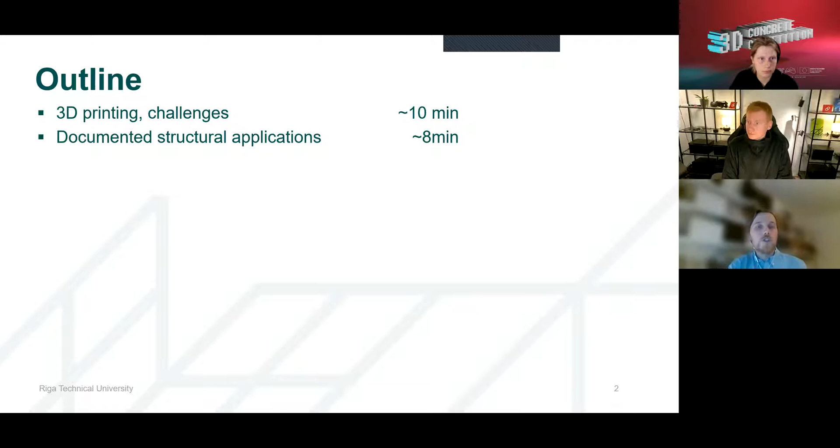Then I will show some documented structural applications of 3D printing, with emphasis on structural, show some topicality in the industry right now, show what we are doing at the laboratory in Riga, and what the 3D concrete printing industry is doing in Latvia in general, and show some examples that may help you in the process for the 3D printing contest. So the first part will be more general about 3D concrete printing, and the second part will be more specific, probably for this event.

For the first half of my presentation, I have taken the information from the largest scientific conference on 3D printing.

This was last year's conference, Digital Concrete 2020. For some of the slides, there are no references to the original authors. So if you have any real interest in those slides and pictures, you can definitely email me, and I can give the information about the original authors.

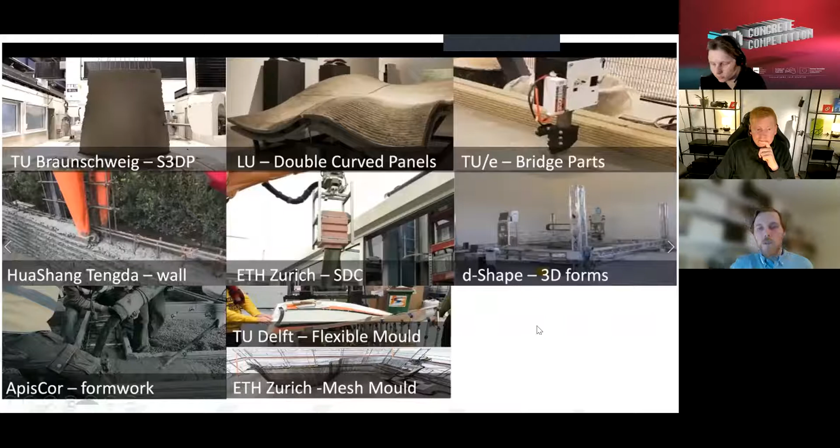If we start with 3D printing, here are actually 9 different pictures with companies and universities that are doing some kind of 3D printing, so we should understand which kind of 3D printing we are talking about today. For example, D-Shape here is producing these structures using powder bed technology. In a powder bed, with the layers you jet in a binder, and then you have this really free form structure. They were one of the first ones to do 3D printing, but this is not the industry standard right now.

You have some more traditional ways, Apis Cor and other companies, using 3D printing as a formwork, or you can call this contour crafting. So you print the outer structure of your wall, for example, and then fill it with traditional concrete. This is also 3D printing. Some more unconventional ways from TU Braunschweig: this is 3D printed with shotcrete. There are 2 robotic arms applying shotcrete to this steel mesh construction. So this is also 3D printing, but with some limitations and specialized.

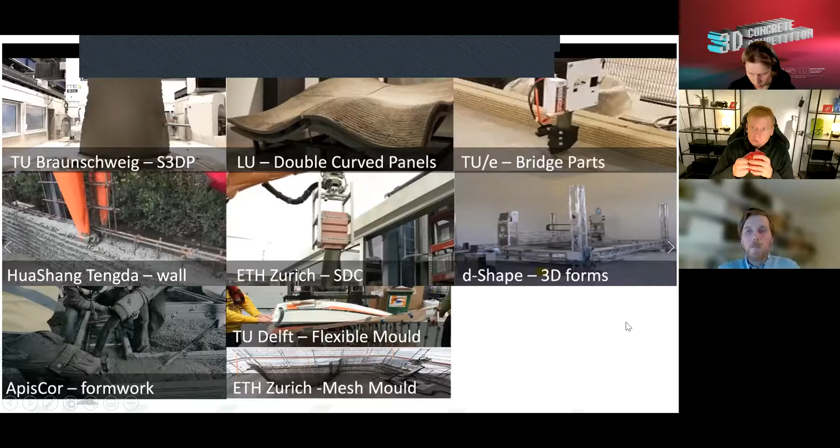For example, ETH Zurich with their smart dynamic casting, slip molds, or mesh mold, where a mesh was produced by robotic arms, and then human labor was just applying mortar to it. So there are different ways that 3D printing is done, but today we will be talking more about extrusion-based 3D printing. This is a process in which a real free-form object is created from a digital file using a specially designed concrete composition and a concrete printer with an extrusion-based print head. So we extrude the material layer by layer.

As you know, there are several advantages to this fabrication method. One is definitely freedom of form, so we can produce free form structures without the need of molds. There is the advantage of automation of the construction industry and optimization of structures, as you will see in later slides, how you can optimize your construction if you apply material only where you need it. And also probable CO2 reduction in the future. That's why there's a question mark, because CO2 reduction, cost reduction, labor force reduction are all probable future advantages. Right now, all of these structures require a lot of cement to be printed, so CO2 reduction is quite debatable.

Material waste reduction: if we were doing only 3D printing all the time and were very good at it, then there would be reduction from molds and material leftovers. But at this point, I would say material reduction is still debatable. So there are significant advantages, but you have to be careful, as this is a new emerging industry. There are a lot of claims in mainstream media about wonders this technology can do.

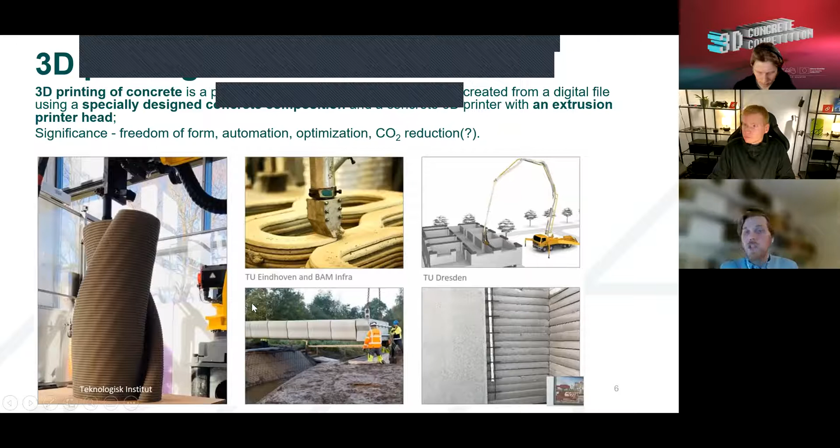They are printing with these fast setting binders, where you can print really freeform structures. Or, for example, TU Eindhoven, who is printing and applying steel reinforcement at the same time, and creating, for example, bridges that you will see also in later slides.

Or, for example, TU Dresden, who is envisioning that 3D printing could be used to print more regular structures using traditional methods, just with the print head at the very end of this building process. I will show right now a few different extrusion modes that are possible.

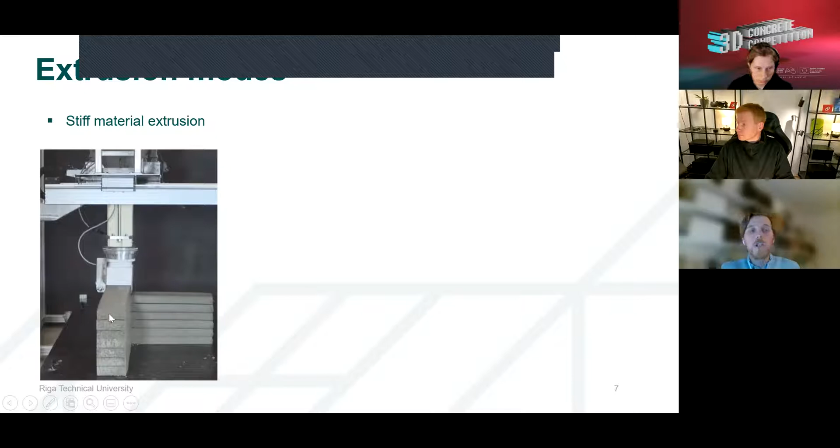So we can work with stiff material extrusion, but this has some limitations. The buildability with this material is really great. You can build high, but there could be problems with the layering, and problems with the pumping of this material and extrusion. There is a possibility to work with extremely flowable material, but then you have to have a fast setting material that is setting as you print it.

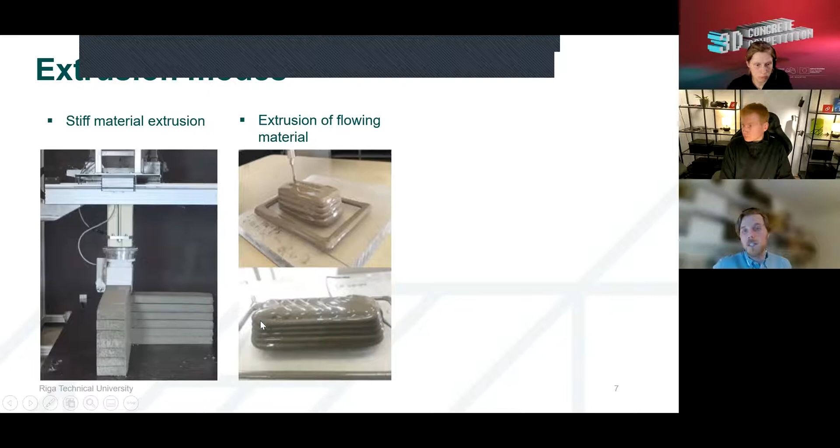And most commonly, and what we are using today, is what you can call oriented pressing. So you press the material upon the previous layer to get a more flat form for stability, and also so that the layers stick very well between themselves.

Here, I think there are. I will see if the video will work very well.

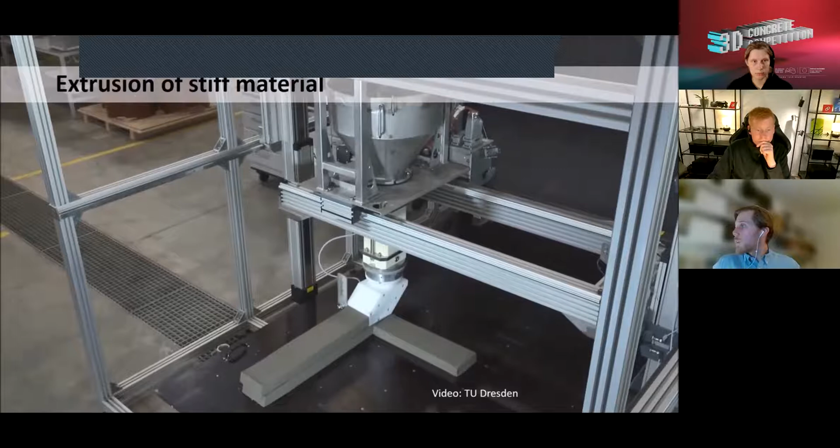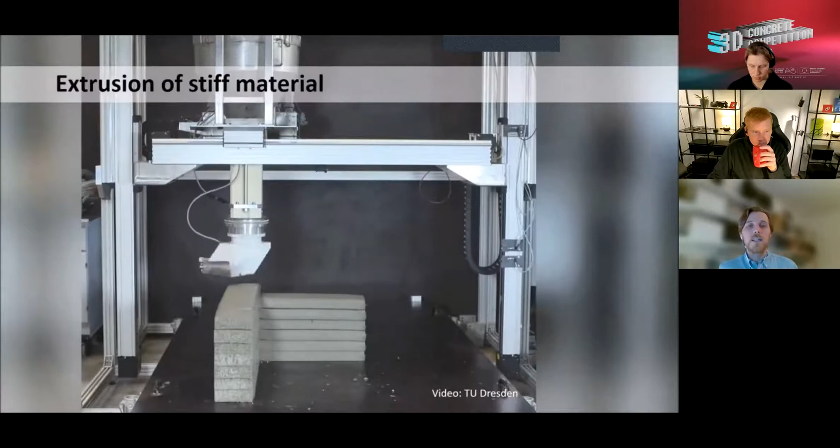I think it's okay. Yeah, so you can see from TU Dresden this extrusion with the stiff material. It looks really nice, but this is definitely not something that is being done in industry today. Or you can work with a very flowable material. This is done by several companies that have these fast setting binders. But usually it is something in the middle, with the material that is used for this oriented pressing.

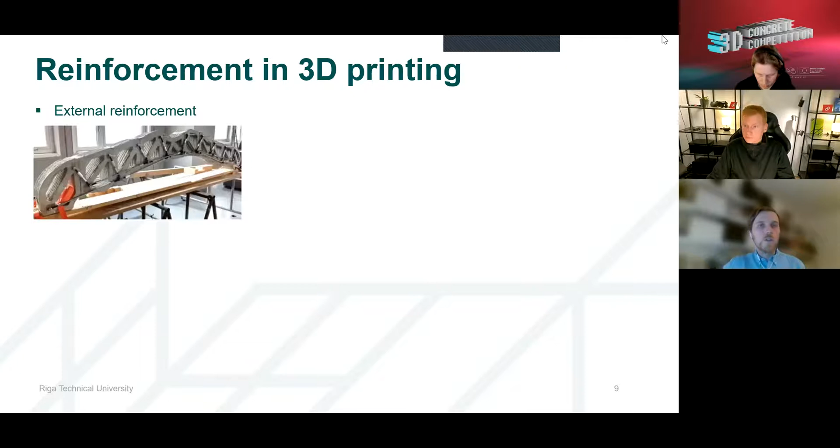I will cover a little bit also about reinforcement in 3D printing, because reinforcement and 3D printing are not very compatible. As you understand, in traditional concrete you first apply reinforcement, then you cover it with concrete. Here, it's not that easy to do that. So there are several methods. First of all, you could do external reinforcement, but this is definitely not done regularly, because the reinforcement is subjected to corrosion, and this is an expensive and really unconventional way to apply reinforcement.

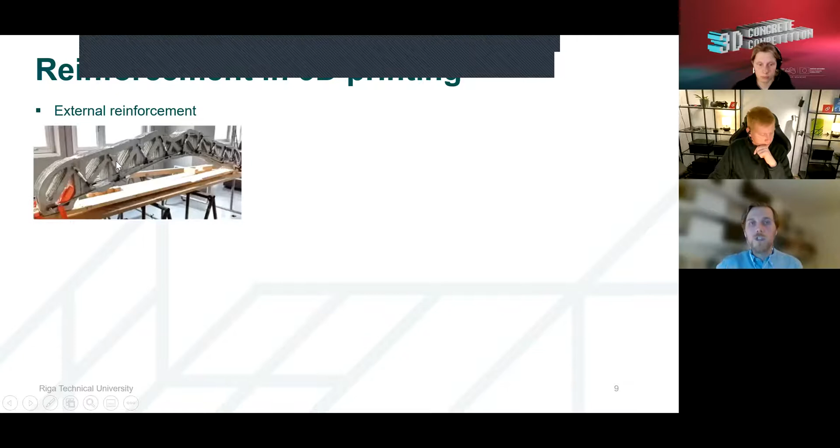One of the ways that is being used in 3D printing is post-tensioning. So you print these different blocks. Actually, they are printed sideways, and then flipped around, and afterwards, like you can see here, there is traditionally cast concrete. There is a steel wire that's run through all of this structure, and tension is applied to these wires, so it keeps the structure together. So it's one of the ways you can apply reinforcement in 3D printing.

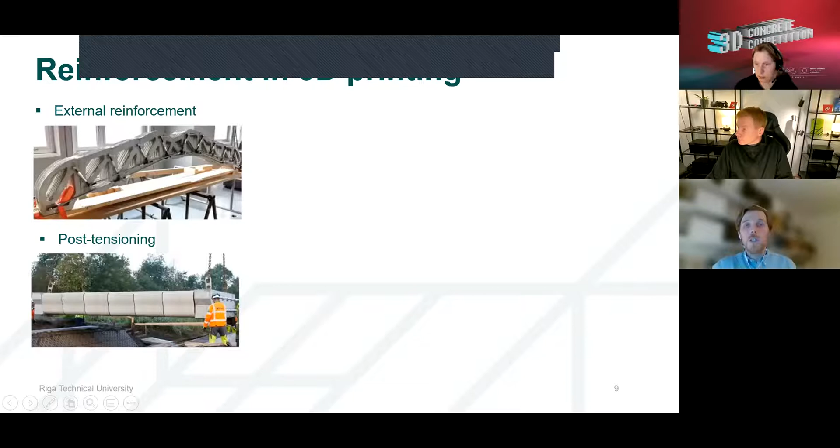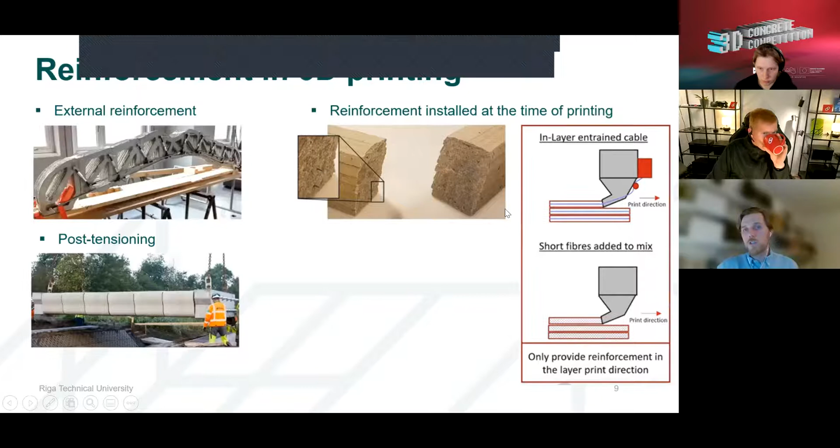You could have reinforcement installed at the time of printing. This is, for example, done at TU Eindhoven and only some other places. There is a small steel wire, but this does not cover all the reinforcement needed for these structures, so they actually use post-tensioning and reinforcement at the same time. For this structure, both of them are used.

And then you can do permanent molds or contour crafting, which is actually done quite a lot in industry. You have probably seen the highest 3D printed building in Dubai. They had 3 stories built by Apis Cor. There is this permanent mold system. So the walls are printed and then it's cast with traditional concrete. So the engineers know how to calculate it, and everybody knows that this building will stand in place.

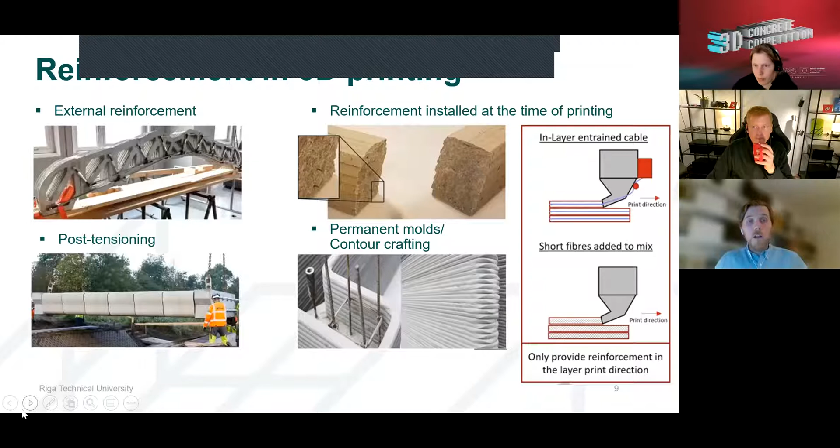You need this reinforcement because concrete is really bad in tension. So you need some reinforcement to provide these capabilities. So we need to think about reinforcement quite a lot if we think about the structures that we are going to build. Most commonly, contour crafting could be the one that we will be talking and thinking about more in the context of the competition.

Some challenges in regards to printing, to the print head. You can have technical challenges. That's more of a challenge with your G-code. That is the one that is created after you first model your object, then you slice it, and then you generate your G-code. So either the extrusion rate is too slow, which could be fixable quite easily, or the extrusion rate is too fast.

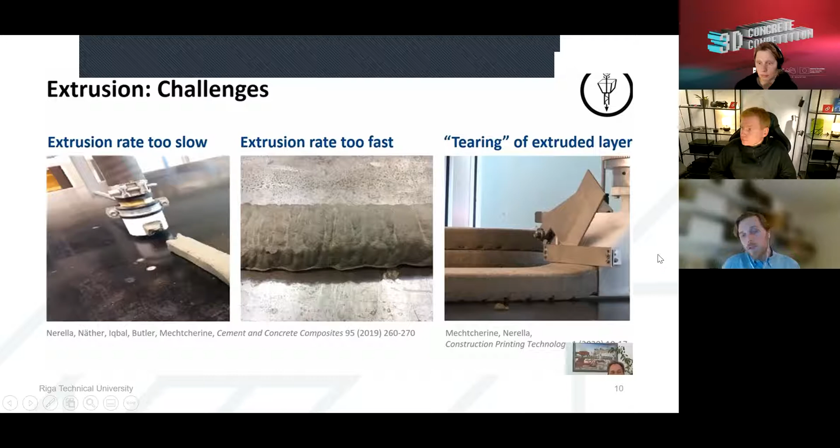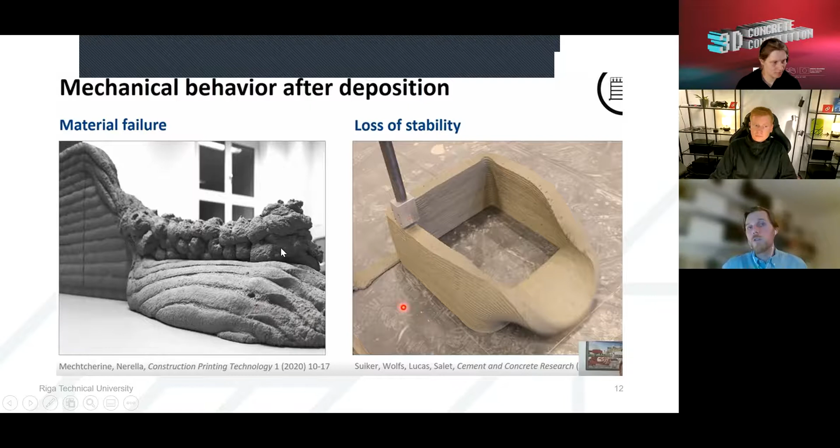And also there are different ways the material or your construction will fail. Either you can have material failure from yielding of your material at the lower ends, or buckling of your construction, so it just collapses, but this is more connected to the geometry of your structure. The other is more with your material itself. So either you have material that you cannot extrude, or material that is yielding at the lower levels, or it's buckling from the height of the structure that you have been building.

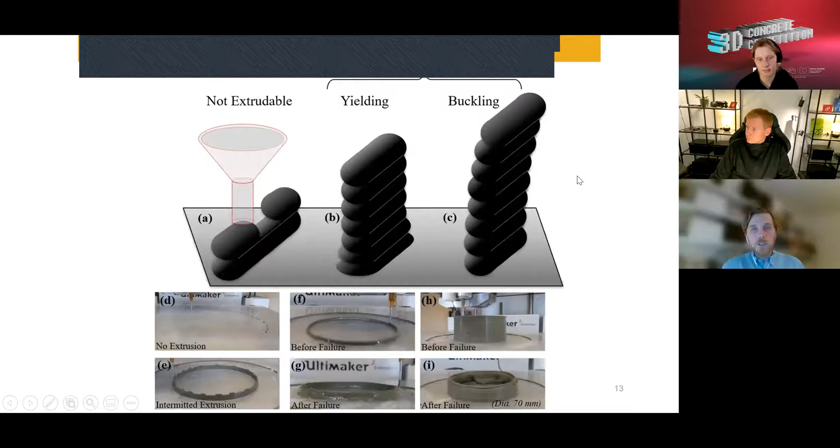First, which is a bit like a starting point for 3D printing, was called the Future Tree. This was done partly by ETH Zurich, and this is not a fully 3D printed column. They wanted something that could be calculated by the existing building standards. And one way to do that is to use traditional reinforced concrete. Here you can see the reinforcement, and to pour it into some form.

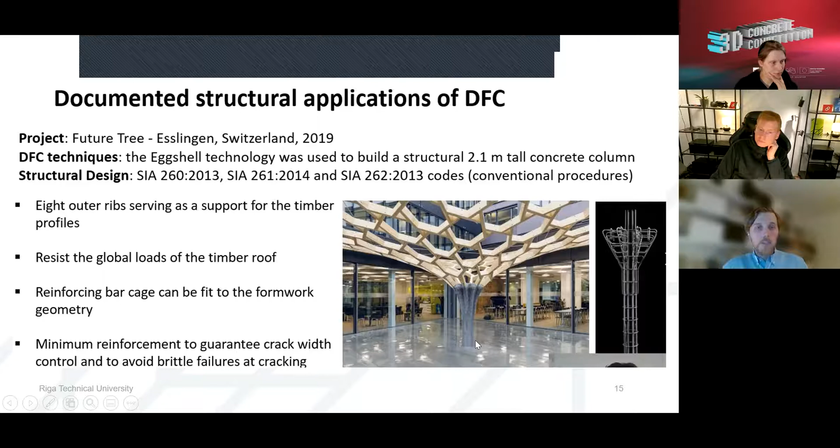So they 3D printed, we will get back to the slide, the outer shell. They call it eggshell. The idea is to print a really thin shell to use similarly to formwork in construction, but in this case the shell is really thin, and if you applied all your concrete and just poured it in, it would collapse. So the idea was to print the mold and cast the concrete at the same time. I think in the end they went with casting it in layers because they have this really fast setting concrete in Zurich.

But anyway, this structure is, you can say, partly 3D printed, because this is traditional reinforced concrete holding this wooden tree canopy, and it is calculated by existing construction standards, because that's really important in construction. Everything is standardized, and you will see later on what happens if you don't have standardized construction.

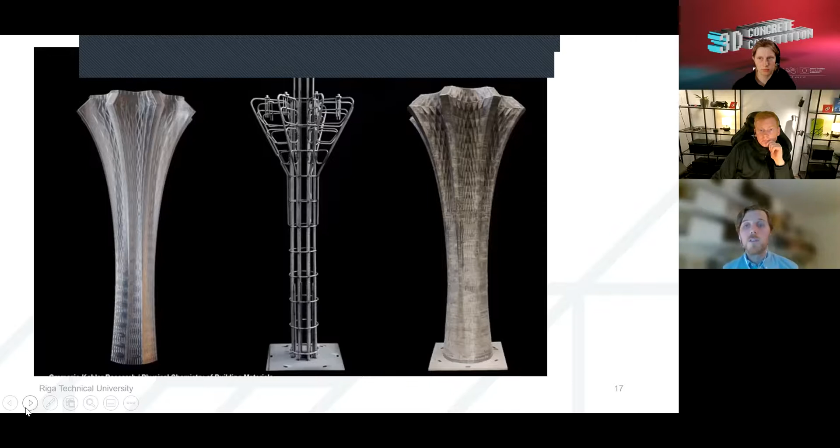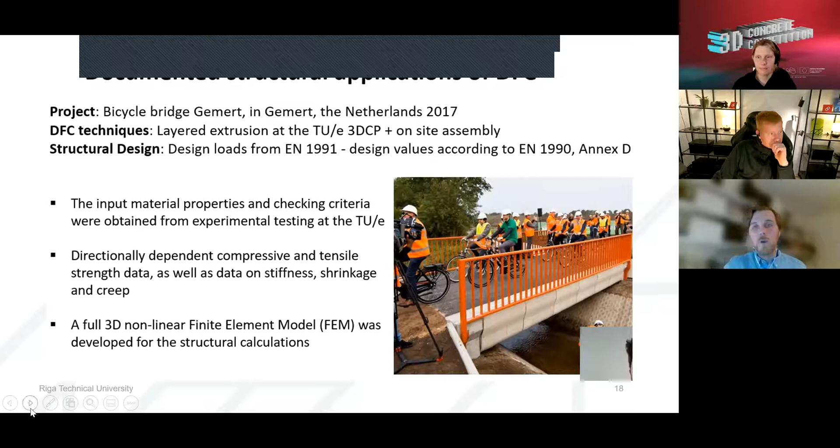One of the ways you do this in construction is called design by testing. You have to prove that your construction will hold the loads, and you have to build a scale model. It's a large scale, it's 1 to 2 scale. So you have to build almost the same bridge, a little bit smaller, and you have to destroy it. This is a destructive 4-point bending test. You bend your structure until it collapses.

You achieve the desired data to validate whether your model is correct or not. You can use the structure or not, but you understand that this is a really expensive way to make structures. If every structure were designed this way, it would not be sustainable. This is only for the development of this industry. So yeah, that's one of the ways this can be done.

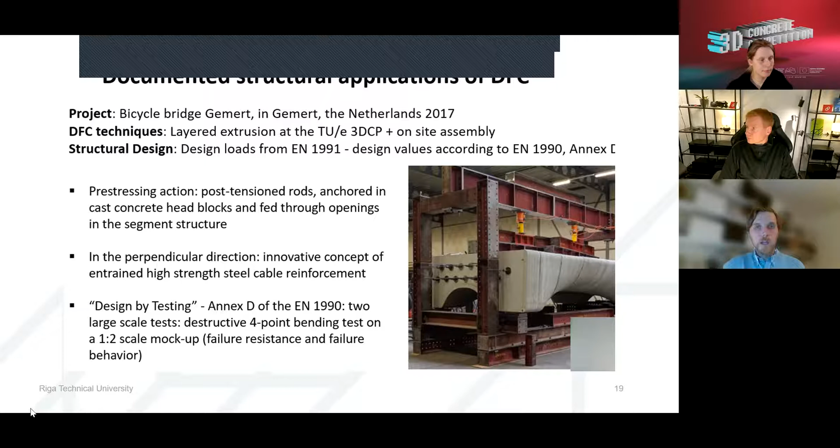This is something more simple. This was done in Innsbruck. I think this was with the help of Baumit, a construction materials company, and the university in Innsbruck. So the idea of this pavilion was that these are all separate elements that are self-supporting. So they are designed in a way that they are freestanding, and nothing else holds them but only themselves.

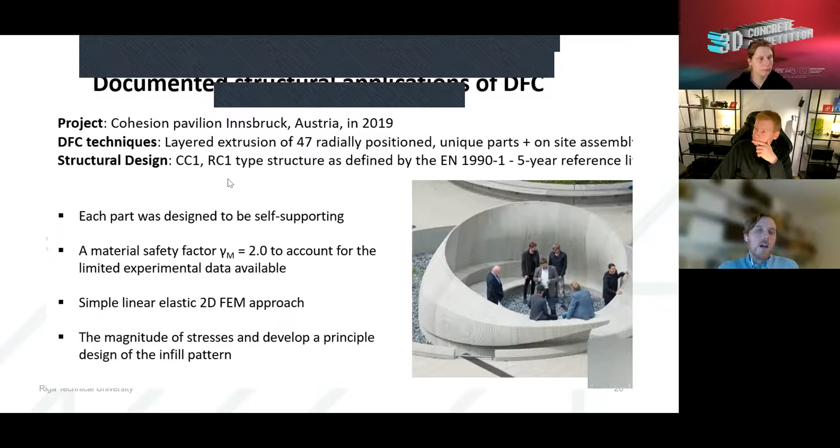And the idea is that they are calculating, as this is not a highly risky structure. So consequence class 1, it means that nothing too serious will happen if something breaks. Okay, maybe this might fall on somebody, but this is the lowest level of consequence class. So you have less of a problem if something goes wrong.

But anyway, the way they designed it, they used more material safety factors. So in construction, it means that it is anyway on the safe side. So we know how this material will behave, but we just take 2 times the material. So we know it will definitely hold everything that needs to be held here. And that is one of the ways how these 3D printed constructions can be built and designed according to some local or national building standards. And this is also one of the ways how you can do it.

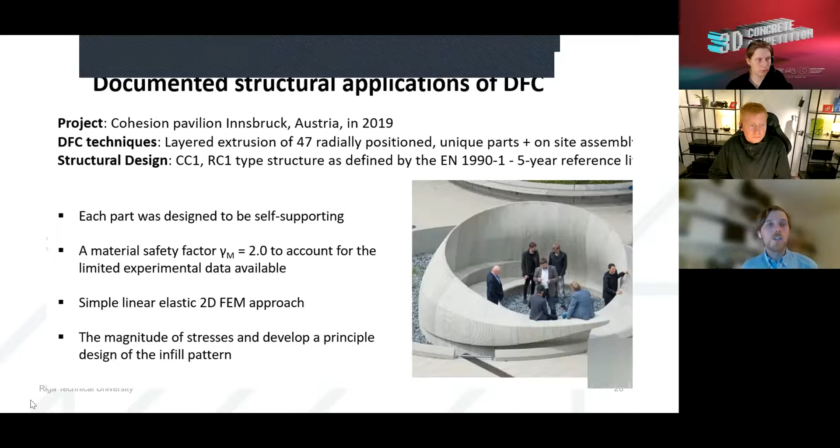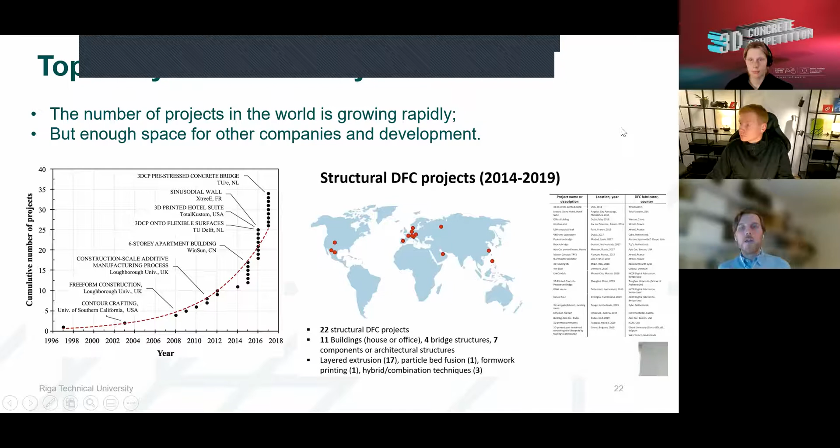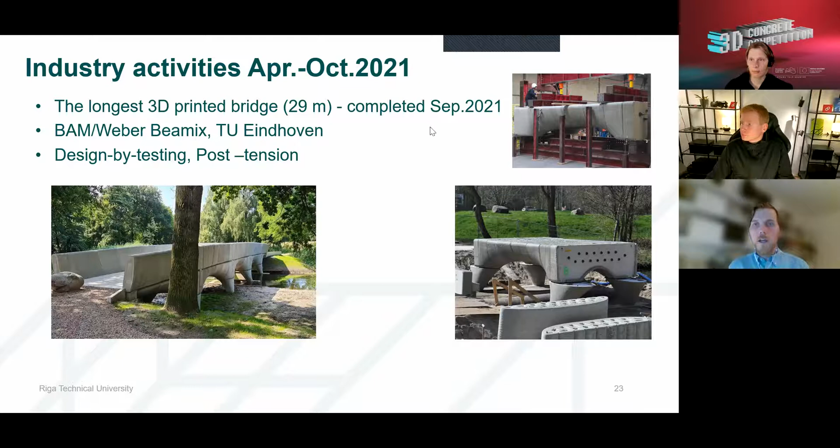Usually we try to look at the latest projects that have been completed, or some news about them, because we cannot cover all the projects. So this was similar to the last slide that I showed. This is from TU Eindhoven with their industrial partners Weber Beamix. I think it was in September they completed this longest 3D printed bridge. So this was also designed by testing. These elements had to be tested with really large scale tests. And as you can see here, this is like a cast element in this contour crafted form, and here are the places for the post-tension wires to go in. So this is the way they constructed this bridge with quite a large span.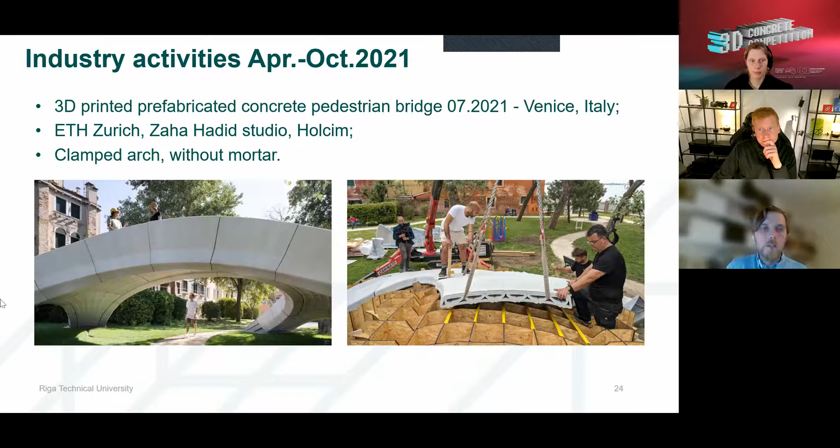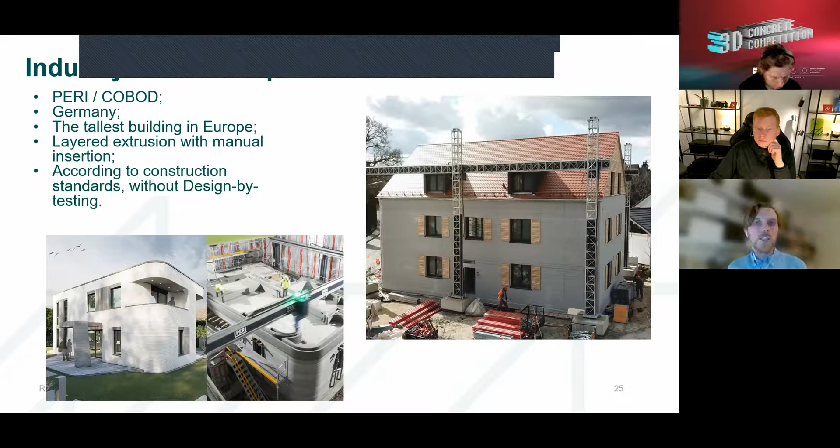But in this case, and I am not completely sure, as I understood, they were using standards of unreinforced masonry structure here, but I don't have yet a confirmation of this.

Totally different approach, a little bit off the topic of the 3D printed concrete, but of course we can print with different materials. As in the start of my presentation, I told you that concrete and cement is not the best materials when we think about climate change and CO2. You can work with different materials in 3D printing as well.

Here from a producer WASP, that is a producer of 3D printers, different kinds of printers, small, larger, medium size, and these larger crane WASPs, and they show their capabilities by printing this clay structure. So this is not a load-bearing structure. It's a clay structure that is filled with rice husk insulation. So this is really a sustainable and probably climate neutral building.

And the cost of this material is also not that high. But of course, the technology is still quite costly to build in such a way. But 3D printing is helping different kinds of materials to be accepted in the construction industry, definitely.

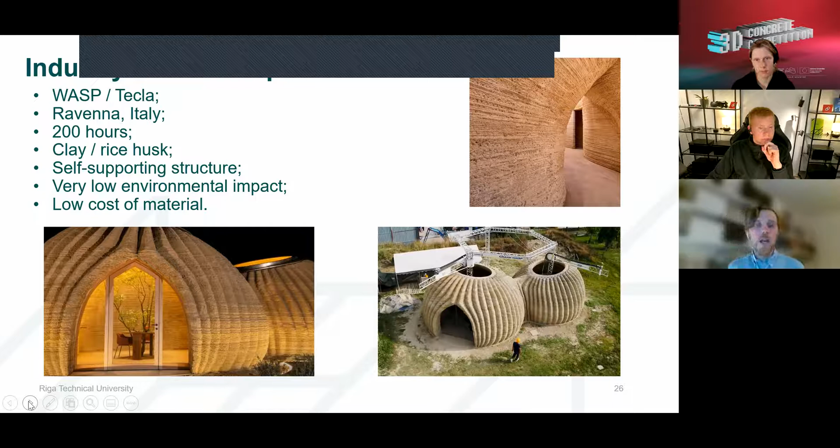Some maybe more down to the ground approaches. I don't know if this company Bruil from the Netherlands have achieved their goal, but last year they presented the idea of reconstructing an existing building. Here, the building itself is not 3D printed. So it's an existing building. It was from, I don't know, the 50s or 60s.

And the idea is that they need to refurbish it, and they were planning to do it with such printed elements. So here you have actually a limited number of unique elements, some balconies. So here you can test all of these elements, and then you can build the whole house with such elements. Definitely a maybe more cost-effective, more time-saving approach to 3D printing by applying it to quite large scale.

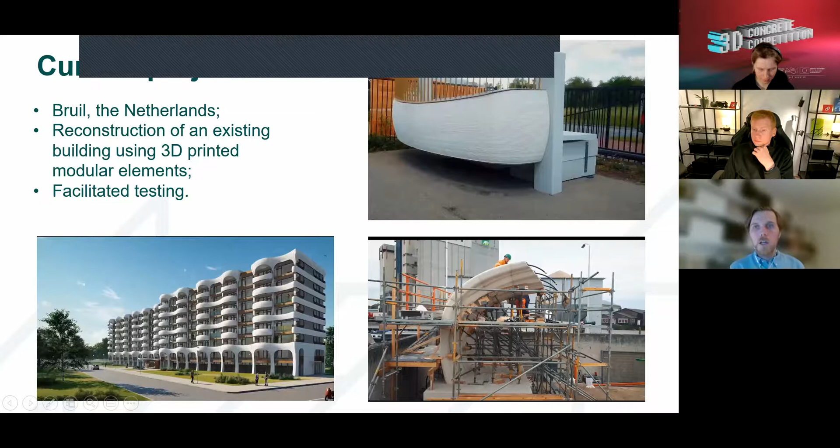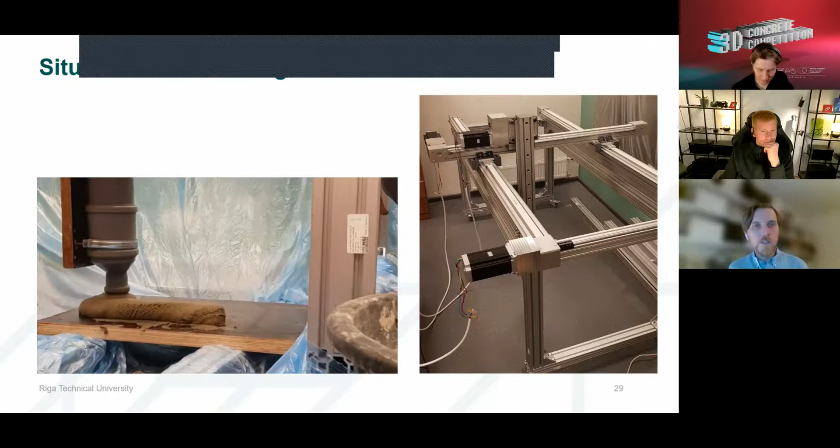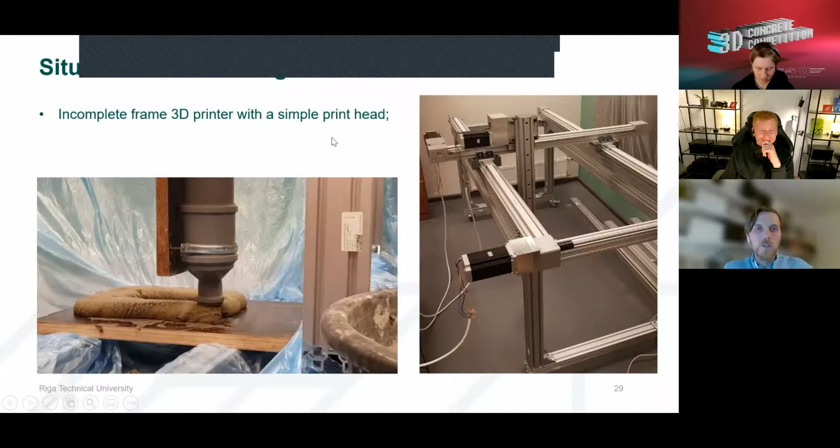Let's now look at Riga Technical University. So this is how it looked 12 months ago. We had this incomplete 3D printer, gantry printer frame with a very simple print head. It's a PVC pipe. We had one researcher working in this direction. Of course, others were working with materials, but 3D printing was not a very hot topic in our university, and we had no industry support.

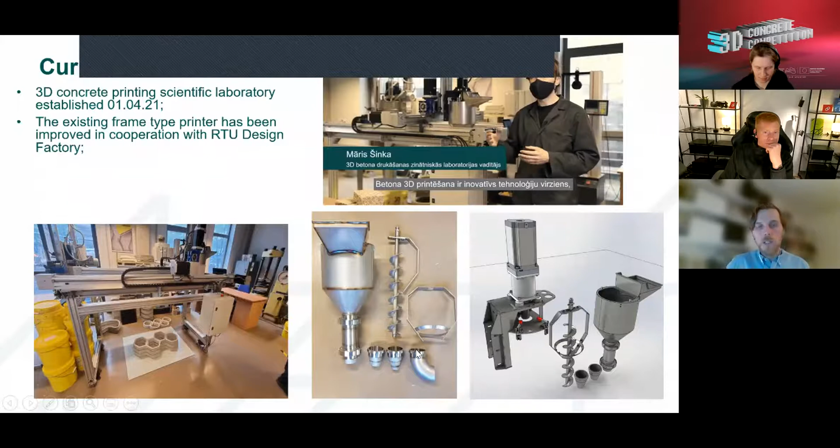And now, some 12 months later, we established our 3D printing laboratory on the 1st of April this year. Here is an opening video of our laboratory. So we finished our existing gantry type printer, built a new batch type print head. We'll be expanding this print head and attaching pumps and mortar mixers to it quite soon, as this project is continuing right now.

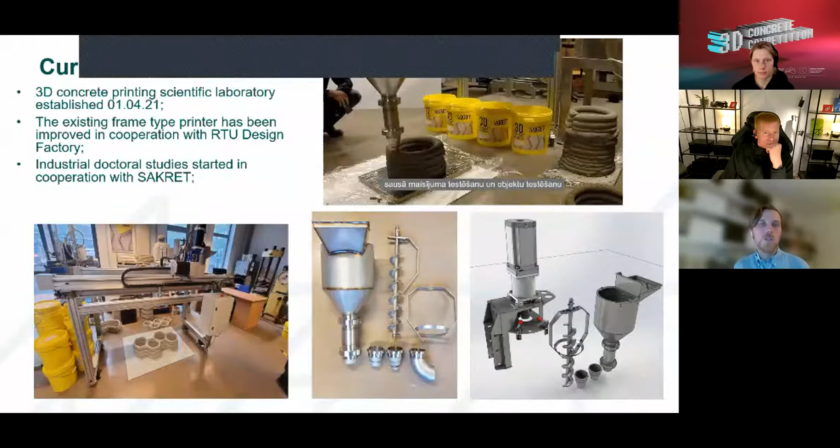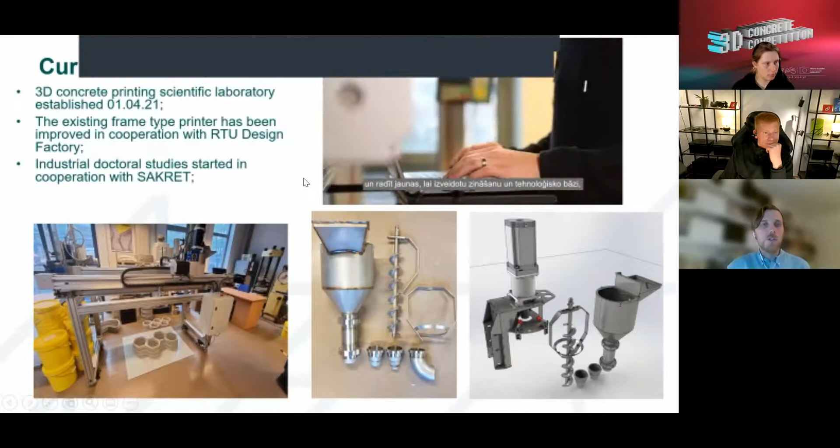We have been partnering with an industrial partner. It's a company Sakret. It's quite a big company in the Baltic states. It produces dry mixes for construction. And we have an industrial PhD student who is working and being sponsored by this company. And several other researchers and research directions have been started in our university.

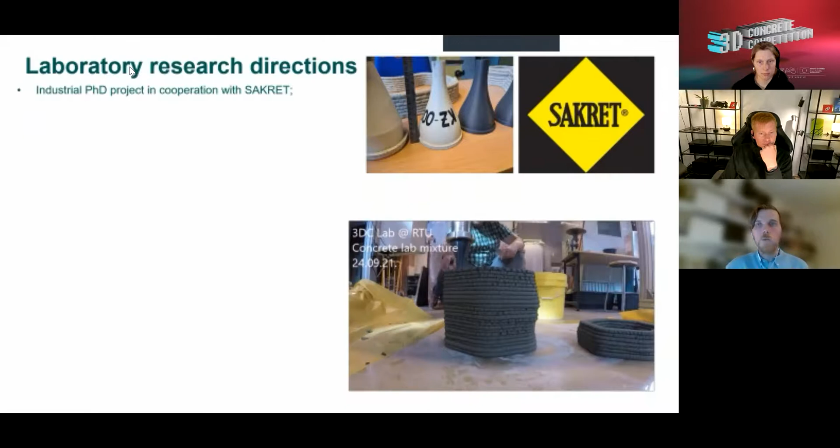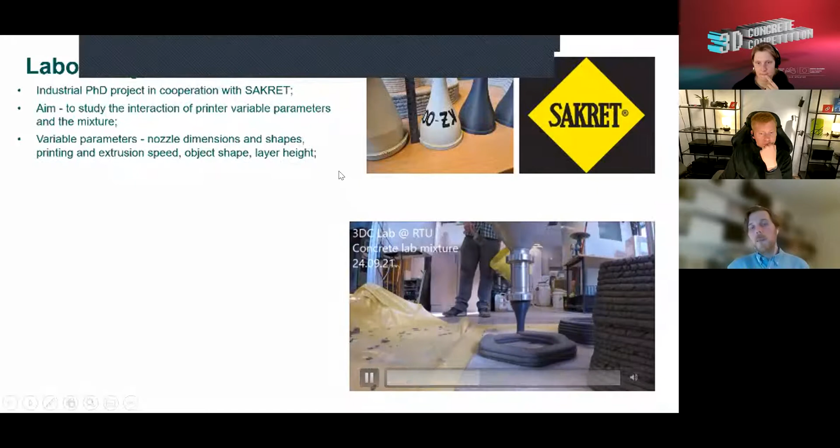So a little bit about the scientific directions. As I told you, we have this one research direction that is done in cooperation with the industry partner Sakret. The PhD student is trying to see the correlation of the printer and the mixture that Sakret is developing, how they are compatible. So looking at various variable parameters of the printer, like nozzle dimensions, different nozzles, different shapes for printing, different extrusion speeds, object shapes, layer heights, and testing different mixtures that the industrial partner is offering.

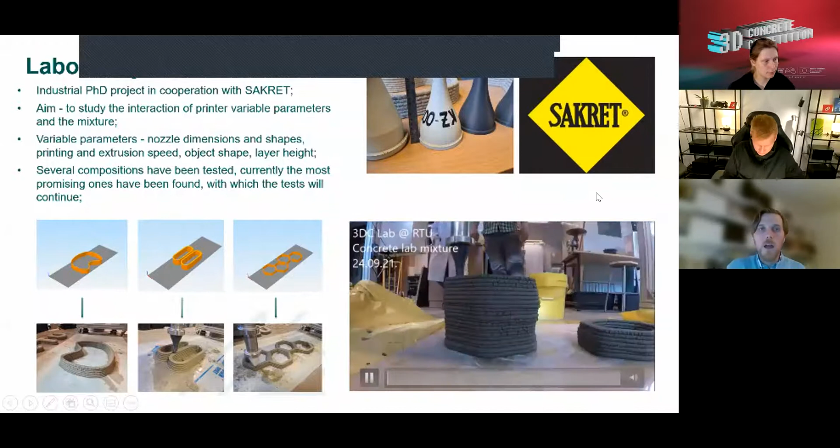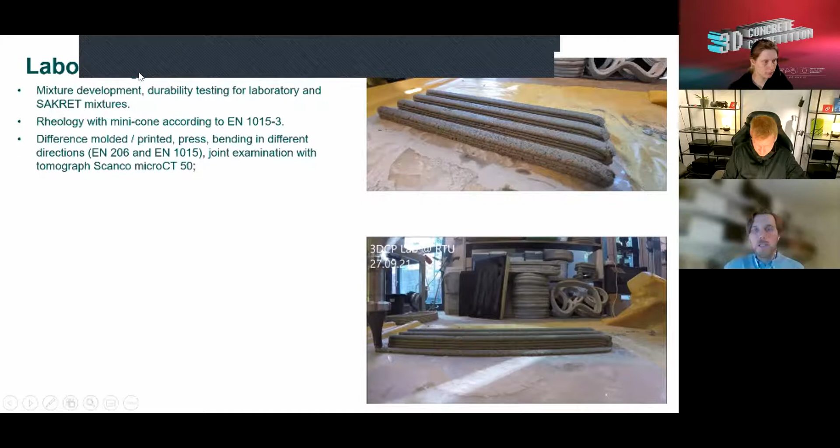Other research directions that our laboratory is right now starting. We are also into durability testing of these materials. We started it only this September. A lot of information about the testing methods, probably not very useful for this presentation. But the idea is that we test how these 3D printed materials compare to casted concrete, to regular concrete.

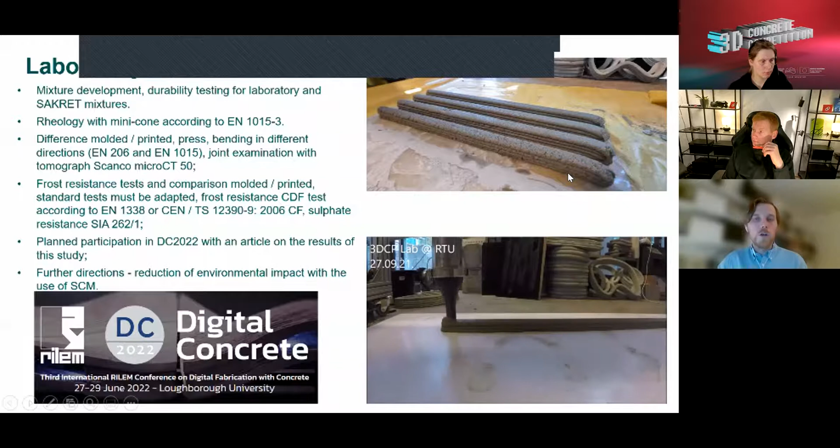Yeah, so we print the material, then we cast in the molds and see how their strength, how their durability differs, and whether or not this material that we are trying to print actually, for example, can hold a Latvian winter.

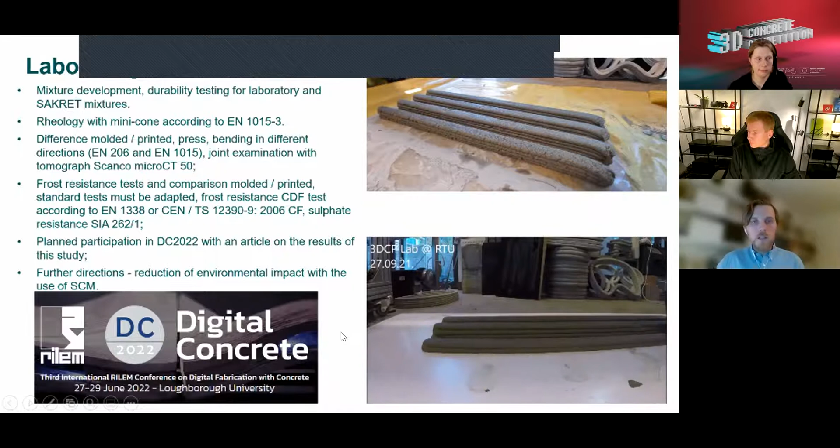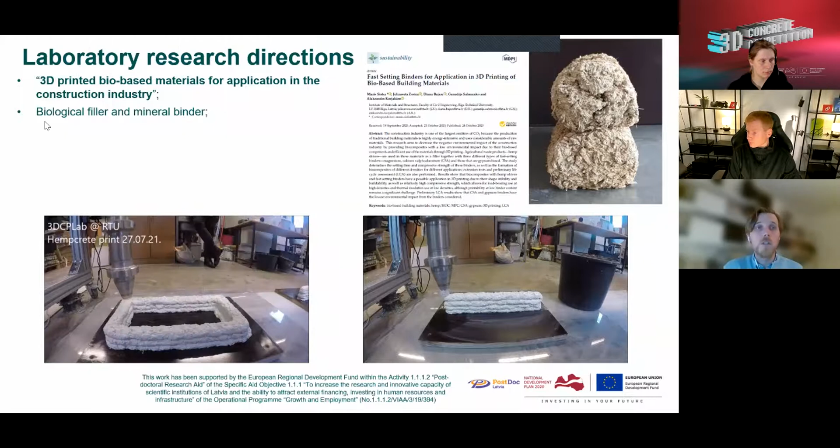And one of the last directions that we are working on, this is my scientific project. We are trying to use bio-based materials in the construction industry with 3D printing. So in this case, the bio-based material is a biological filler and mineral binder. Here is a material called hempcrete.

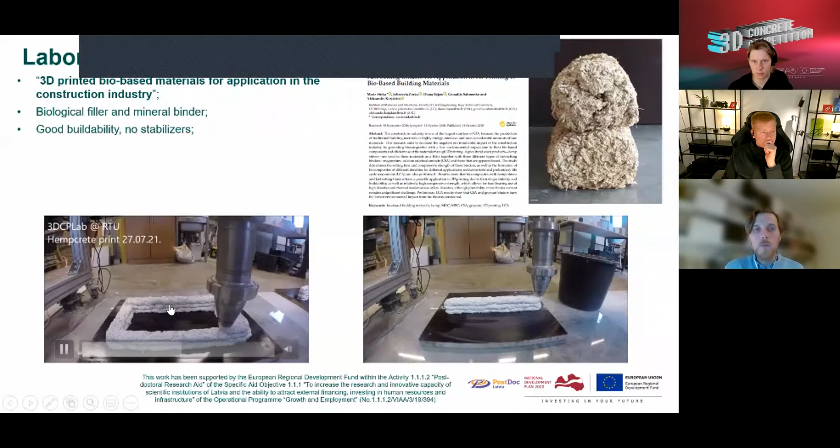It's made from hemp shives, a byproduct of the hemp fiber industry, and mineral binder. Here it's printed with simple hydrated lime. So this is definitely an interesting material to be working on. Maybe a little bit further from industrial applications than concrete, but something similar to what, for example, the WASP company did with their clay structure could be printed with hempcrete.

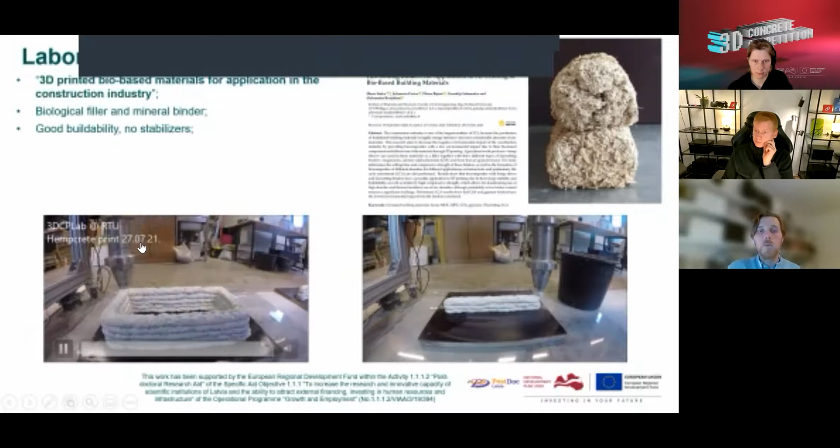So it has really unique buildability. It means that you can build quite high without adding any stabilizer. If you print with concrete, you need special additives so the material doesn't collapse. Here with hempcrete, there are definitely some advantages. If you are into these materials, you can check out one of the articles about this subject that we did last year.

And a little bit about how it looks with the industry. Some weeks ago, we organized the first industry meeting in Latvia, because we as a laboratory intend to be a contact center for the industry, to help everybody join forces for this industry to become more active. Here are the main industry players working in Latvia right now.

The company Sakret, as I told, is a dry mix manufacturer. PROFABB and FabControl are working more on the printers or software for printers. Company Constros, still in development, is producing ceiling panels from wooden wool and printed gypsum, using printed gypsum to create free-form ceiling panels. And there is a company 3Dtech.

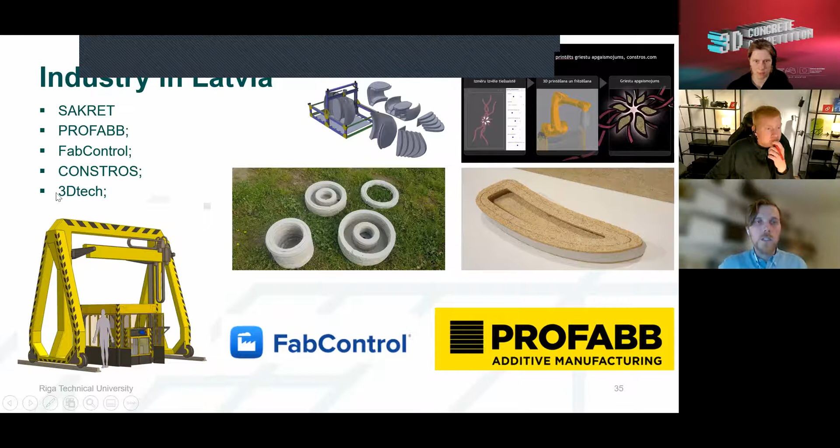Maybe you have seen this green hangar that was in the background of Evia. She's a student working with this company, and they are based in Jelgava. Quite a new company, so they are still working on this technology. They have bought a printer called AMT from a company in Russia that has developed these printers for some time.

They have good cooperation with one of the municipalities in Latvia and good plans for how this 3D printing technology could be applied to some municipal projects. We wish them luck, and we'll try to cooperate with them as much as we can.

So let's now look at the 3D printing contest itself. Here I gathered some of the limitations of the printer that we have in our lab today. I have mixed feelings about these limitations. We discussed with Māris that we need some frame for the students to work in. But on the other hand, I don't want to limit anybody too much, because you might end up with really simple and uncreative structures. But you need to know these limitations exist.

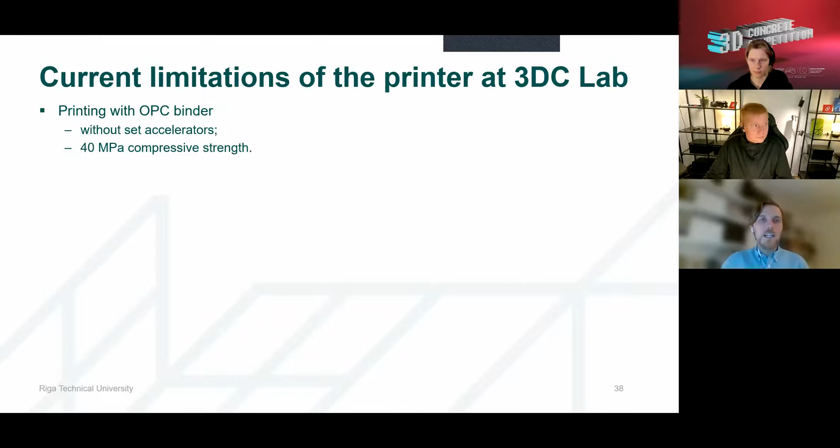But there is, let's say, an asterisk to every one of these limitations. Currently, we are working with a cement-based binder. There are no set accelerators, so it doesn't set very fast, which means you cannot get any free-form structure that you want. This material has to take some time to set. If you print one layer upon another, it cannot go like 45 degrees and just stand in the air.

But it has good mechanical properties. When it cures, it reaches 40 megapascal compressive strength, which is quite okay for the construction industry. Regular concrete could be some 25, 30 megapascals. The mixture we will probably be working with is from the company Sakret. So good buildability, but medium set time.

One other limitation could be nozzle sizes. Here we can see the 3D printed nozzles that our printer is using. These are from 20 to 30 millimeters. We have some larger nozzles that are from steel.

Stainless steel, but I don't see a point of them in this competition. But it is possible to use, and as you can see, these are not very hard to make nozzles. So if we need something different for your competition object, probably it's not a problem to make some new nozzles.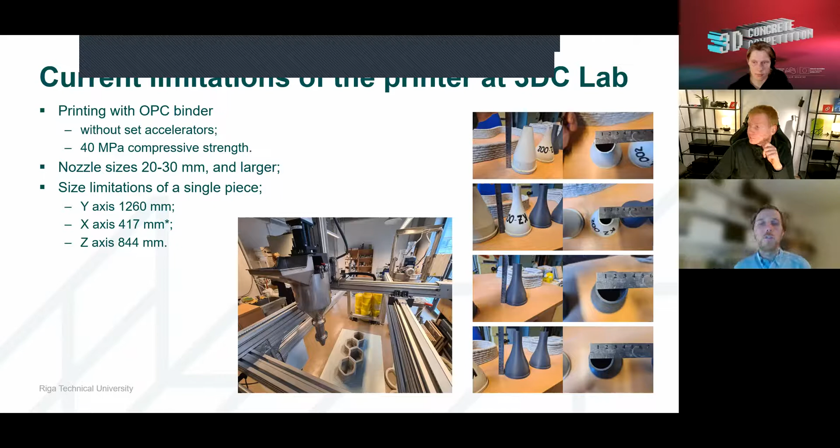And also, as you have seen from the slides, there are definitely different approaches how you can do it. If you want to print your whole house in one go, okay, yes, you need a COBOD printer to do that. But this is probably not the aim of this competition that Māris is organizing. Here, I also showed some angle limitations that could be printed in one go. And again, here is an asterisk, because of course you have workarounds around these.

If you want to print, for example, if you have one object that needs to be printed, and you need this quite large angle for it, you can have something to support it at the bottom. Maybe somebody needs to make some, I don't know, like a supporting structure from either polystyrene or something more recyclable from sand. I have seen such a printing where you are doing your mold from sand. You can recycle it definitely, and your structure doesn't collapse when you print it.

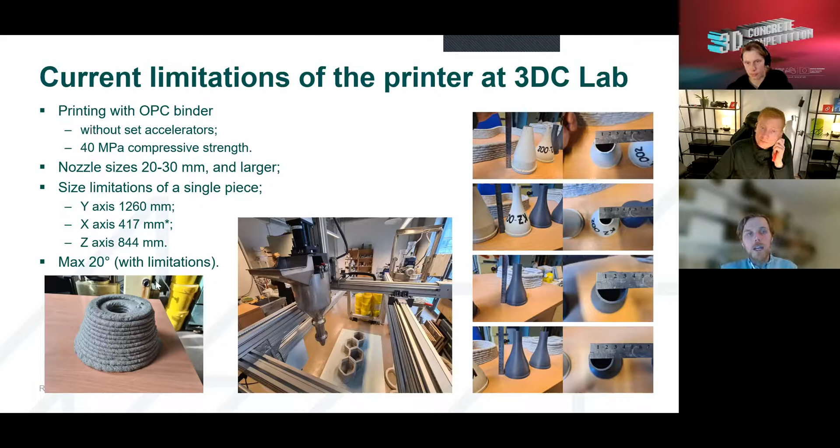So all of these have some asterisks. They are limitations, but you shouldn't focus very much on these limitations, because you might end up with some not so creative objects.

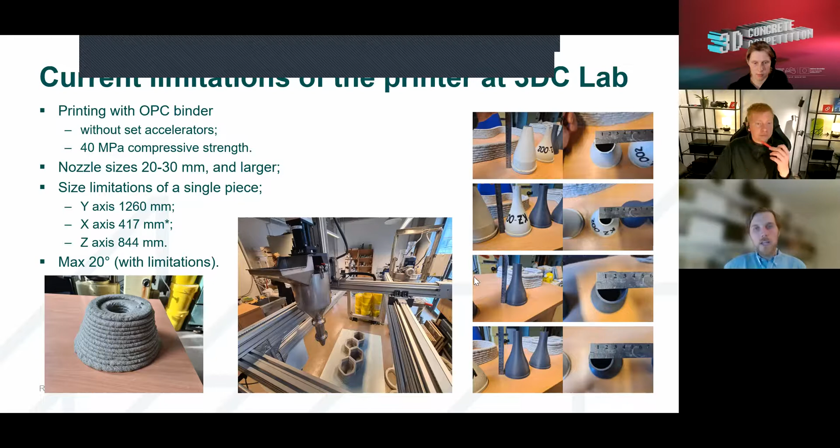Here are some of the objects that have been printed. For example, if you stack these layer upon layer, put some reinforcement here, pour it with traditional concrete, you can have different interesting structures. Here are some models, and then the prints that the PhD student has been doing in celebration of the 1st of September or the Olympic Games, or like a concrete chair, and you print it sideways, and then you stack it up and sit on it.

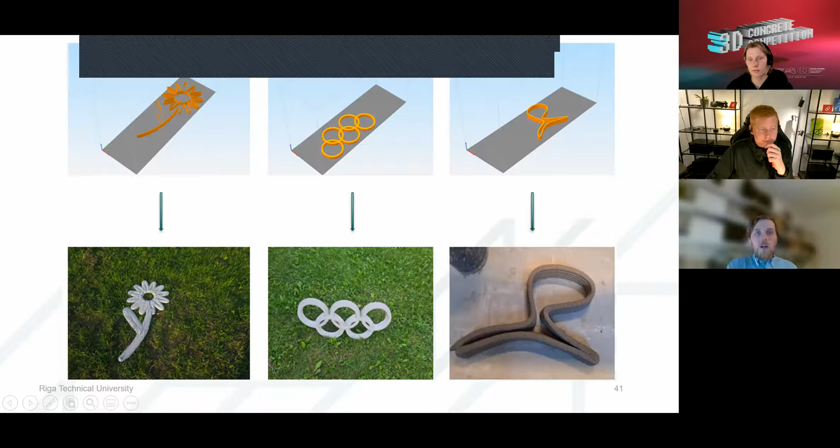This is an idea for a leg for a Christmas tree. For example, if we cannot do this angle right now, here is one cylinder, and this is like a next layer. So it's actually quite full, and this whole angle doesn't need to be left alone, so it can rest on a 3D printed structure that has been printed at the same time. So different workarounds how you can solve these issues.

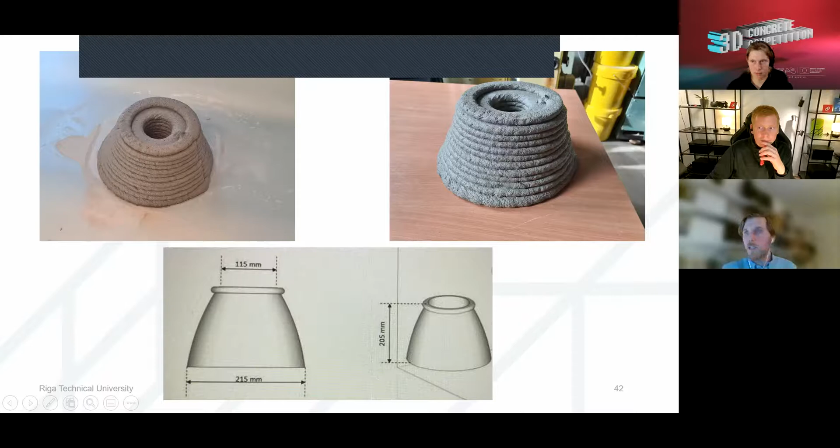And now at the very end we will look at different examples. These are examples that can be found on this Facebook group. You can join this group. I think it's one of the largest, and different 3D printed projects can be seen here, and definitely draw your inspiration from this Facebook page.

So we are starting with some, and you can find all of these. I don't have references for these; I didn't want to put all the references. You can find all of these projects in that Facebook group. I think it was only the last 3 months of pictures. So these are quite simple constructions that definitely can be printed, not that hard.

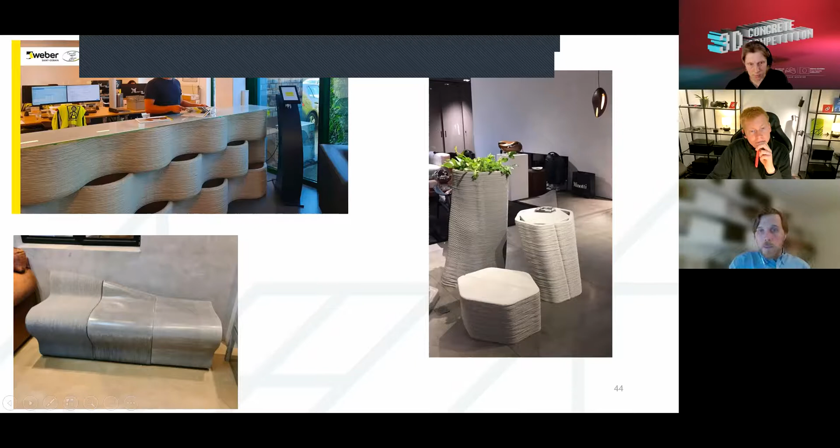These you print sideways. Probably you can fill it with traditional concrete, or if the structure is very well designed, you don't even need to. These angles and rotation definitely can be printed. So this is a good way to start. Maybe let's say more traditional. This was from, I think, Czech Republic. So some freestanding examples.

It's also something that can be done. It's a chair. Some reinforcement maybe is needed here so it doesn't break, but this is something doable. If you can turn it around into maybe something more interesting, I'd say this is something to be looked at.

Here, the idea of an arch, definitely you can see this is actually, I'm not sure, a small bridge, probably some small bridge, and the principle of an arch is used here, so it holds itself in place. So you're probably not completely sure, but if you reinforce it at the end, you don't need any extra reinforcement here or at the bottom if it is an arch.

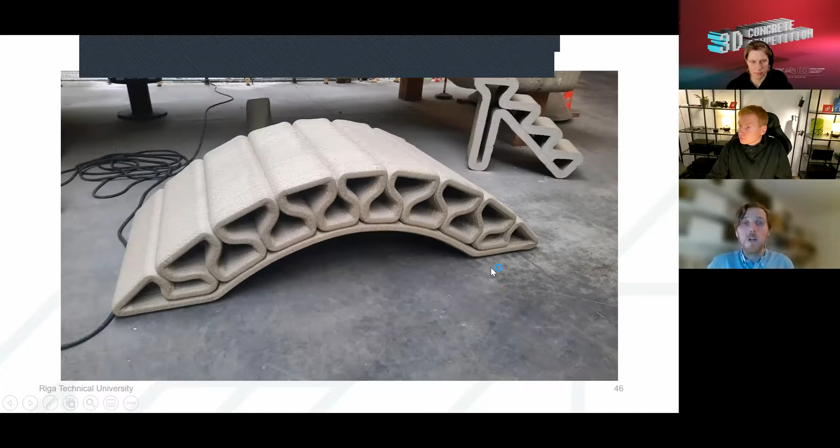This was, I think, also from Czech Republic. You look at it, it's like a 3D printed parkour park. But if you look from the top, you can see it's actually a contour crafted 3D print. So these structures are contour crafted, only the outer layers are printed, and then it's filled with traditional reinforced concrete. So a way to design and build it without the need of testing or hard calculations.

This was from China. I think one of Māris's friends did this construction. It's an interesting way how you can do pavement. So if you can 3D print it, definitely some interesting patterns here you can see.

If you print such large surfaces in this way, then in Latvia the question of durability might come into place, because people will put salt on it so it doesn't get covered with ice. This will affect durability of your concrete. So there are some limitations, but definitely possible.

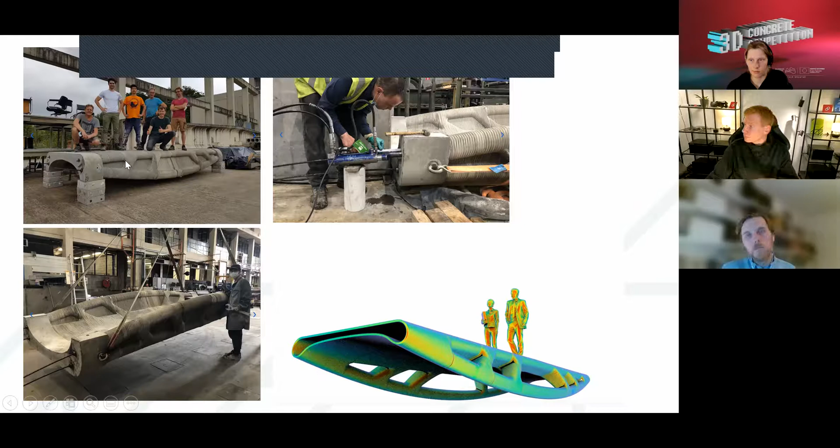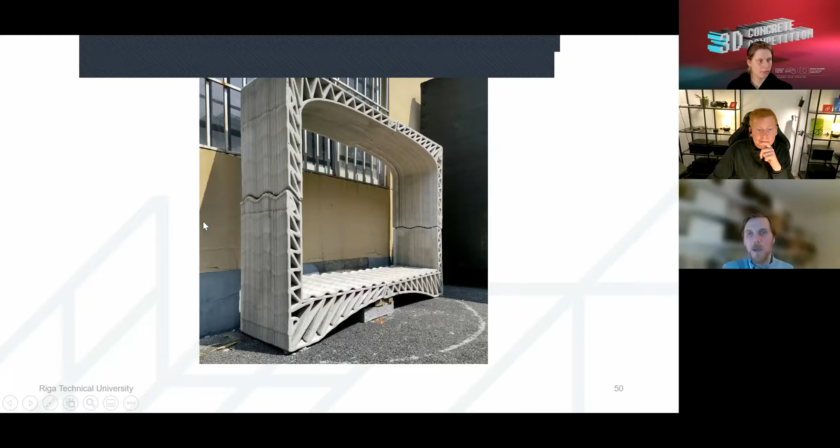Also, this structure, I was not sure of the context it was put in the Facebook group. Maybe there is some calculation how it can be freestanding, but I would not suggest making something that can break while somebody can stand beneath it. Maybe it is safe, but it definitely doesn't give an impression that it is safe. So I would avoid something like this. Try to avoid roofs made from 3D printed concrete, at least for now.

And I think this is a really great example of a creative approach, because here the actual 3D printed elements could maybe even be done without 3D printing, because they are the same. Maybe a missed opportunity, because there could be a pattern with different 3D printed elements. But anyway, they are separately printed pieces put into this load bearing frame. It was metal or wooden, I don't remember.

And the idea is that you get this really great lighting object, and this is, I think, a really great approach. This is not so technically hard to do. It's not a high structure to be building, but this is definitely a really interesting way.

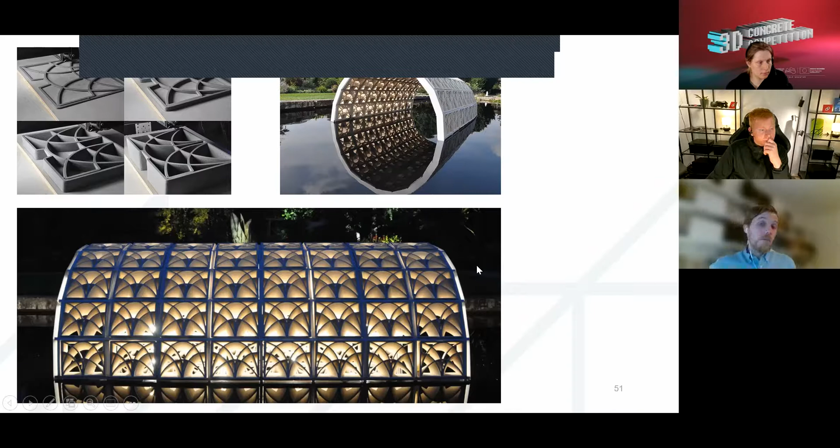Or such a structure. Okay, these are not from concrete, but they could be. I think this was from clay. I didn't read about the project, but it looks like it. You can see there is a wooden structure and these clay bricks. So individually printed clay bricks, resting upon this wooden structure, that I also think are not connected anyhow. So it's only self-supporting, supported by its own weight. So a really interesting structure that you can build.

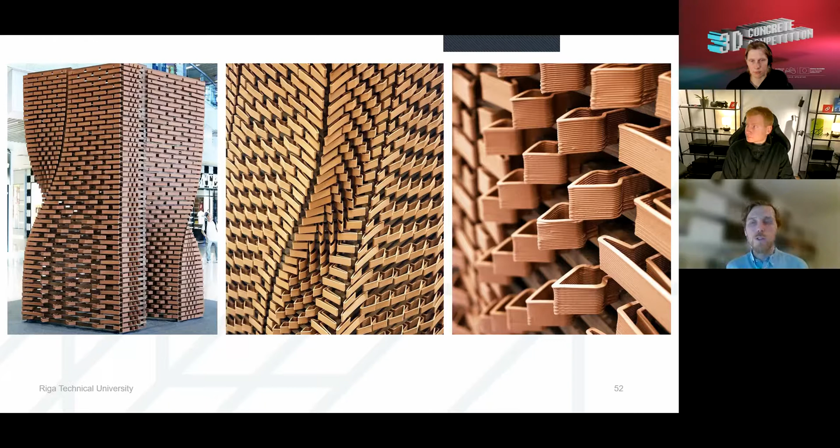Okay, maybe this is not the greatest structure to be putting outdoors, because somebody can take out one of your bricks, but it definitely shows an interesting way how you can think about it, and that the limitations maybe are not actually limitations.